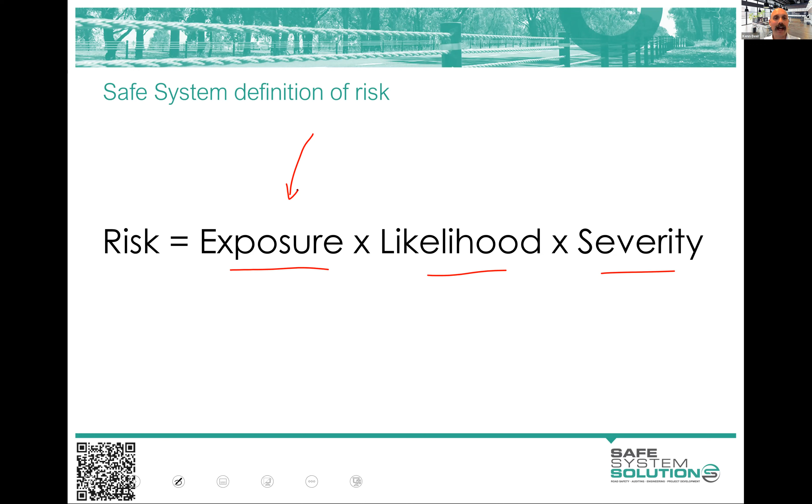I'll remind you what I said in the first session, which was that exposure is really about the number of vehicles, the number of pedestrians, the number of cyclists, the number of motorcyclists.

And you'll see when we get to actually quantifying things in a safe system assessment, it's actually a bit easier to get your head around it because you're looking for numbers. What's the volume? What's the AADT? What's the number of pedestrians or number of cyclists if counts have been done, or you're making an estimate of that?

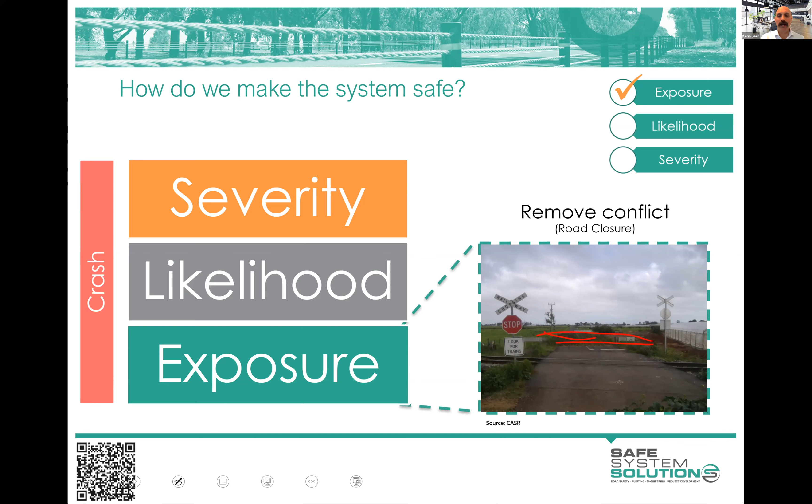And then to influence it, as Mark rightly said, blocking off a leg or blocking off a level crossing in this example removes the exposure because there's no number of vehicles crossing at that point or that separation.

Now, at what point does a separation change exposure to likelihood? So if it was a bike lane, for example, we wouldn't call that a change in exposure because the cyclist is still very exposed to potential crashes.

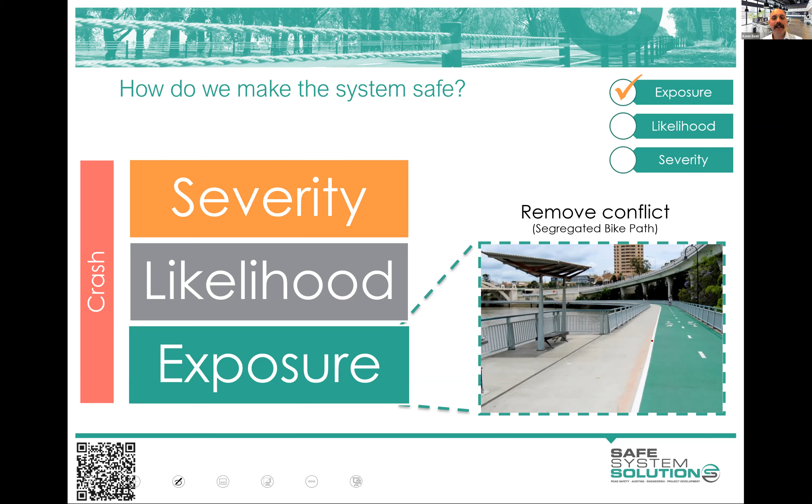If it goes to an off-road shared path facility, like the one in Mark's example, does that mean they're not exposed to crashes, pedestrians and cyclists if it's a shared path? Well, certainly for cyclists, you'd have to account for any that are on the road, still use the road anyway. And then in terms of pedestrians, there is a very slim chance a run-off-road vehicle could get there and strike a pedestrian. But I'll show you, we've got a little fact sheet to help you along this.

Exposure, one of the definitions of exposure in the Australian Safe System Assessment Framework - we haven't got into this yet - but it says AADT, side road traffic volumes, number of motorcyclists, cyclists, and pedestrians crossing or walking along the road. So you can see it just brings us back to numbers.

There's a bit of flexibility in the assignment because it was sort of worded around what's influencing that. So if you had said it's the major highway, or it's the direct pedestrian desire line to the shopping centre or the bus stop or whatever it is, that's okay, because that's going to influence the number of people. But in a safe system assessment, an actual assessment, you're just going to be really reporting on these bits.

When you are scoring things in a safe system assessment, it is important to get some clarity around which category things fit in, just to make sure we don't double count risk. There can be a temptation to double count risk unintentionally, just the way things play out.

We've created the Australian Safe System Assessment Framework document, which you've got a copy of on your memory stick, it's in Moodle, and we'll bring some printouts when we come up. It has some good help for you.

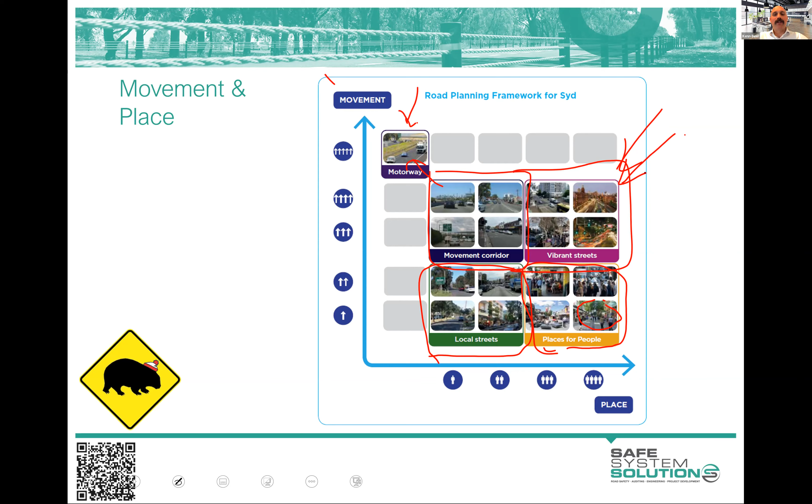So I can get pretty good alignment with safe system principles from a vibrant street by putting up barriers, roadside barriers with maybe pedestrian bits on top of them, so pedestrians really can't get into the street, can't cross the street, and build some big overpasses. By doing that, I'm going to get better alignment with safe system principles. Pedestrians, I probably won't be exposed to crashes there, so the exposure is low, so the risk is going to be very low for pedestrian crashes.

It's going to turn it more into a movement corridor for vehicles then. It's really not going to help the place side at all, because it is going to reduce the place value of the area. It's not going to be a nice place to hang out, to trade, to interact, because it would be very cordoned off. So that's just an example of why you'd be thinking, okay, maybe then if we want to have more place value, we play with the speed and try to do speed calming measures and other bits and pieces. So it's all about the recommendations, really, is why we want to delve into the movement and place. It may help us a little bit with understanding some of the risks that may present, but really it's for good, appropriate recommendations.

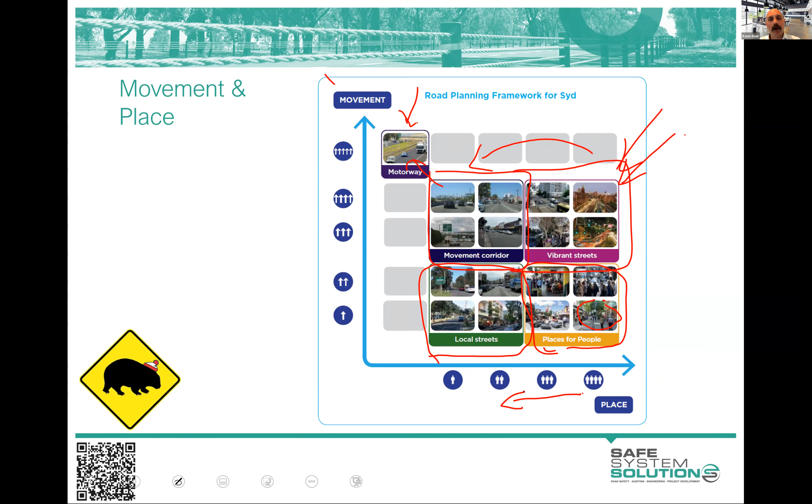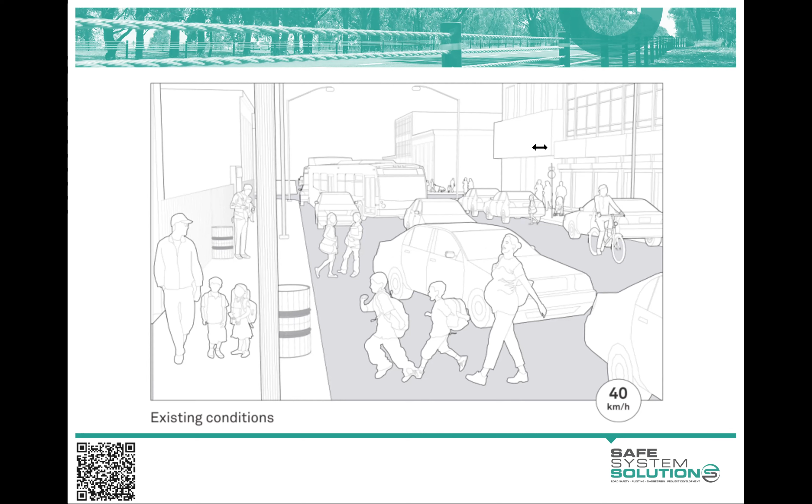Okay, seeing some good ideas coming in. Thank you to people who are putting exposure, likelihood, or severity in there, and you're doing a good job of that. A lot of people are popping in things like... hang on, a few more coming in. This is good.

Okay, so I can see quite a few people talking about things like stopping vehicles getting in there, and I think that is a great place to start. When you have a place for people, it's in that category, or whatever that name is for it these days, the idea of restricting vehicles through an area and changing the exposure to crashes is a great place to start. We've just identified it as not a movement corridor, thus if there are other ways to move through there, that's good.

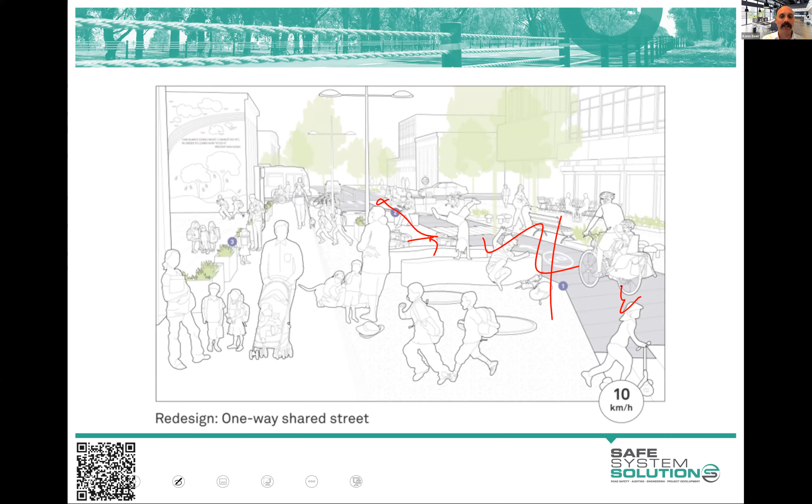As I mentioned, as the movement requirements go up, and some of you already had this in mind, you're creating these dedicated facilities, but still really trying to cater for good areas for playing, socializing, trading, low speed still of any vehicles moving through the area.

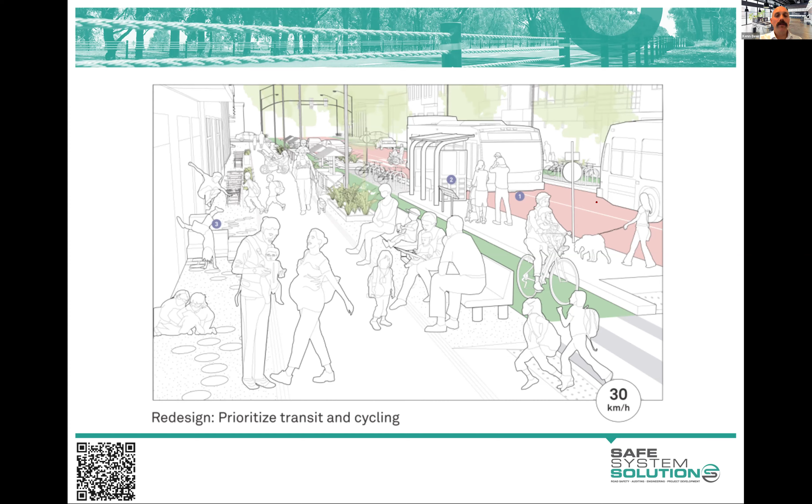We're into those local streets—the local street sort of category, where we're really saying that there's not a major movement required. Of course, there is movement required through there to get people to their houses and for the rubbish truck to get in and those sorts of things. And there's not a huge place value to it. It's not like we're seeing trading cafes, there'll be an occasional cafe or things, but really not this hub of activity like the places for people.

In these scenarios, we're really starting to prioritise the protection of vulnerable road users, because there will be vulnerable road users in the area, in terms of our limiting design factor. And we should be thinking of those speeds of vehicles to keep them within those ranges we want for tolerance to physical force.

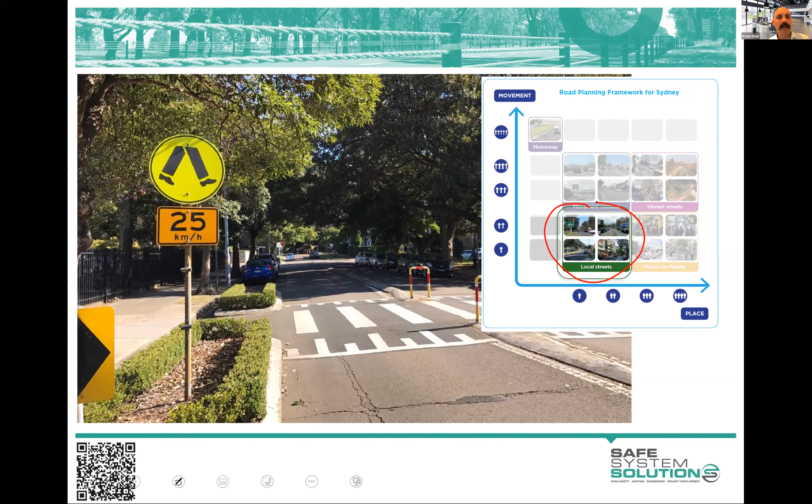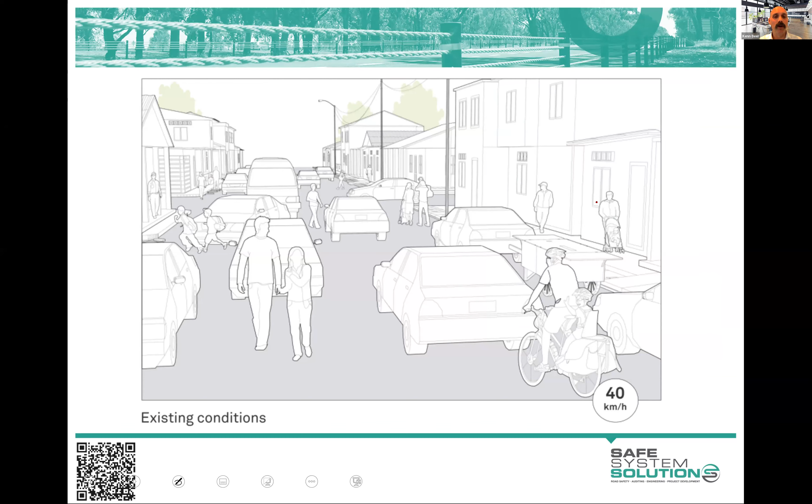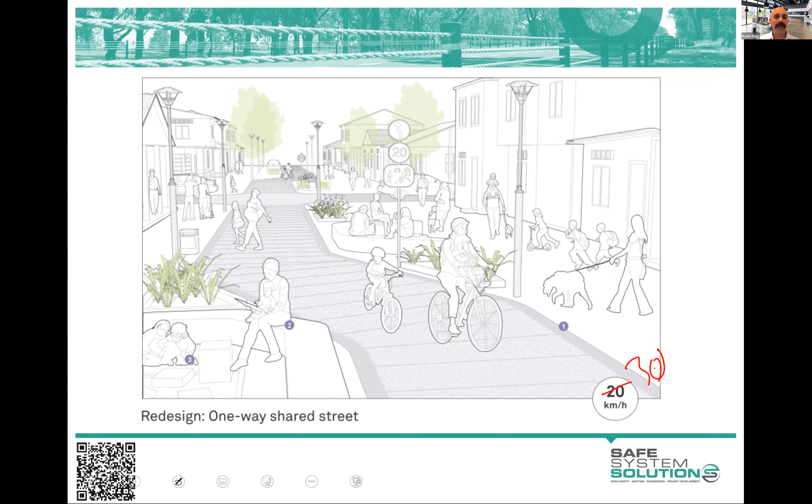So in a scenario like this, which is a fairly dense residential environment—this is an artistic impression—but you'll see it moves to similar sort of stuff, but with a bit more movement facilitated through there. Speed's very, very low still, so 20, maybe 30 through there is very nice. We're not trying to make it so people can run through there or get through there quickly. In fact, we're actively discouraging that because it doesn't have that movement requirement.

But let's talk about vibrant streets. This is a tougher category, really tough in the sense that we want both movement and place. So this is the one I'm going to give you a good 5 minutes on, because I want you to go and have a stretch and fill the water up. So we're seeing here a large sort of arterial road going through an area, and what do we got there? We've got a pedestrian overpass. We've got pedestrians, we've got cyclists, we've got people crossing. There's a bit of pedestrian fencing in a few areas there.

We're going to do the same exercise, but what we're saying is we want to change this, alter this environment, and we want it to have high place value as well as high movement. So we want to sit it really in that vibrant streets category. It's the same thing, just come up with your ideas on alterations here. But remember, when we make these alterations, we want to increase the place value and movement for all road users. So 5 minutes, fill your water up, and we'll get back to you in 5.

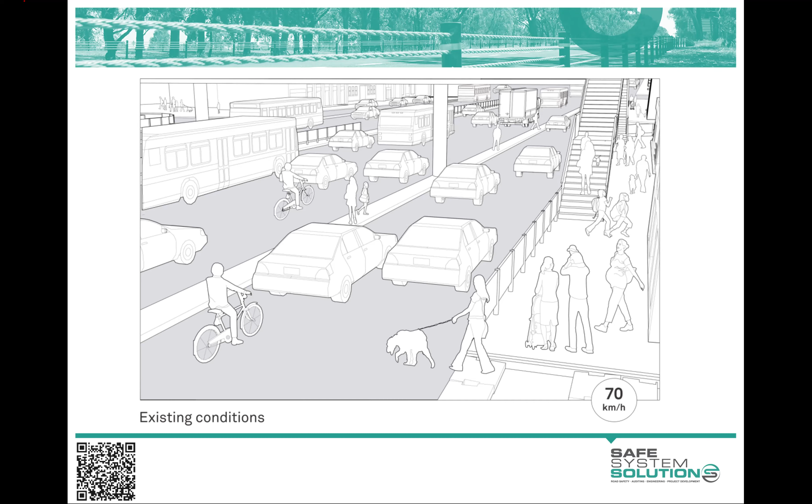Right, another minute to go, and I'll get people to start jotting down a few ideas into the chat again, popping exposure, likelihood, and severity in there.

I'll give it another 30 seconds for people to jot an idea or two down on how we get better alignment with safe system principles out of this area, and we also get it into that high place value, still high movement corridor.

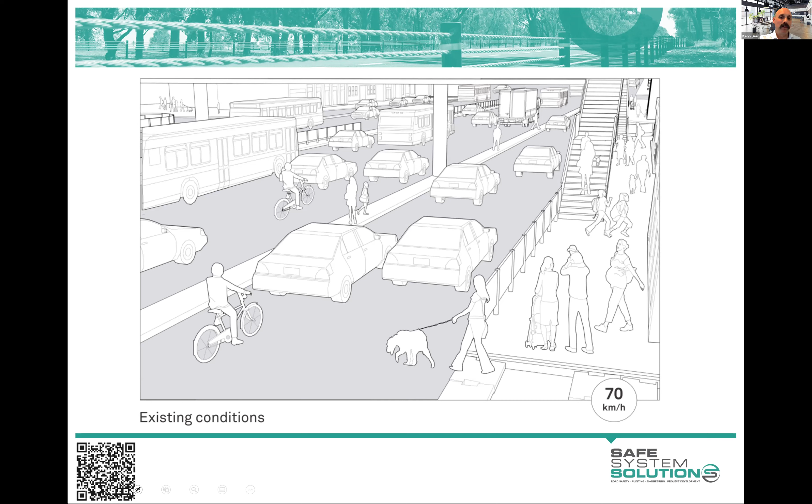Now, in our very traditional sense of movement, if you were thinking of just passenger vehicle speed through there and you did your microsimulation modeling or the like, or you did your SIDRA analysis and things, it probably wouldn't come out as good for the cars. But certainly for other road users traveling through there in public transport, bikes, and the like, plus we get all the place value of it and much better alignment with safe system principles.

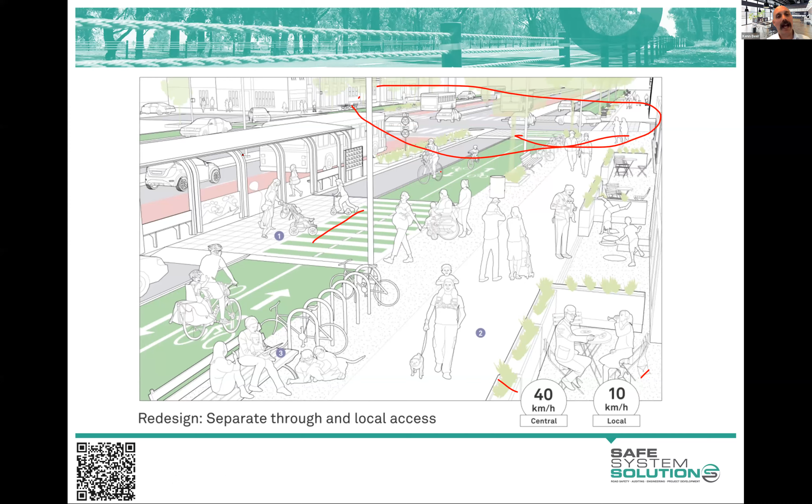And we are seeing some of it, and we're seeing things like protected intersections coming out, so creating those areas for other road users to keep that movement, but also do it in a high safe system alignment. I'll talk about this a little bit more, these sort of protected intersections and those sorts of things later.

But certainly, around New South Wales, we're seeing a lot more of this sort of stuff. And when we do some sort of facility like this for bikes, which is really a pretty good movement corridor for bikes, it has a little bit of place value addition to it.

Are we categorizing that as exposure, likelihood, and severity? I would categorize that as likelihood of crash, reduced by the installation of this for bikes. Vehicles can enter that quite easily if somebody was on their phone or drifted out of their lane. Also, there's the points of turning in and coming out, which provides conflict with passenger vehicles. So it's less likely there's a crash, but there's certainly still the exposure.

When we get into the movement corridors, this is where we can really start to look at things where we don't want to intentionally erode the place value, but there's no need for the requirements to preserve that place value because it's on the way down. So we could do things like fencing through here to stop pedestrians crossing, barriers if we wanted.

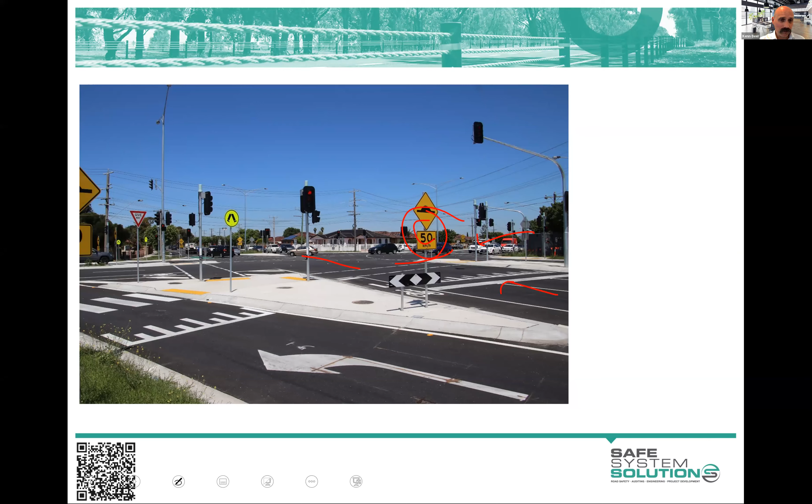Pedestrians and cyclists are obviously our most vulnerable road users. Severe injury risk is around 10% at that 20 to 30 kilometre per hour mark. Death is almost certain for a direct strike of a pedestrian around 50 kilometres per hour. Young and old are even more vulnerable, and you can factor that into your safe system assessment if you have a lot of elderly or young people, factoring that into your severity scoring. We really want to aim to manage speeds to around that 20 km/h mark where pedestrian and cyclist volumes are high, otherwise try to separate. It can be challenging, but the philosophy is there.

But separation is providing us with quite a good opportunity. There's lots of new ways coming out for how it can be done, great guidance documents from New South Wales about providing better bike facilities, separated facilities, Copenhagen style lanes like this, where we push the parking out and bikes can run on the curbside.

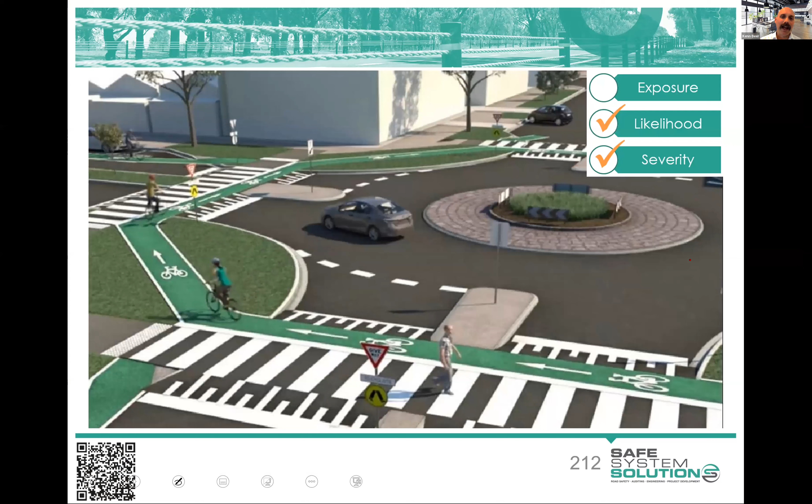And how to treat roundabouts - we know roundabouts are doing a good job reducing the severity of crashes for passenger vehicles. For pedestrians and cyclists, they can be a little more challenging sometimes, and we do know there's a reduction in severity of crashes for pedestrians at least. There's research behind that, but pedestrians really don't like crossing there. It erodes place value for them because it's more challenging to cross.

So things like these protected roundabouts are quite good for reducing the likelihood of crashes for cyclists, vehicles and pedestrians, and the severity of crashes is very low with the slowing of vehicles on approach to the roundabout, and the raised crossing point going around it. This one's the Moray Street one, which has been built. Essentially a cyclist wanting to do a right turn comes around and does that, and off they go - priority for cyclists, priority for pedestrians.

Give way signs essentially make this a road in its own right - the bike facility is a road in its own right. I'm going to try to provide enough storage area for one vehicle to prop there getting out of the roundabout, but a lot of these treatments are installed not necessarily with the bike lane - that's the new bit, but pedestrian crossings around roundabouts are fairly common, lots of those out there. Some people get frustrated by this idea because of the potential for passenger vehicles to come in here and store, clogging up the intersection.

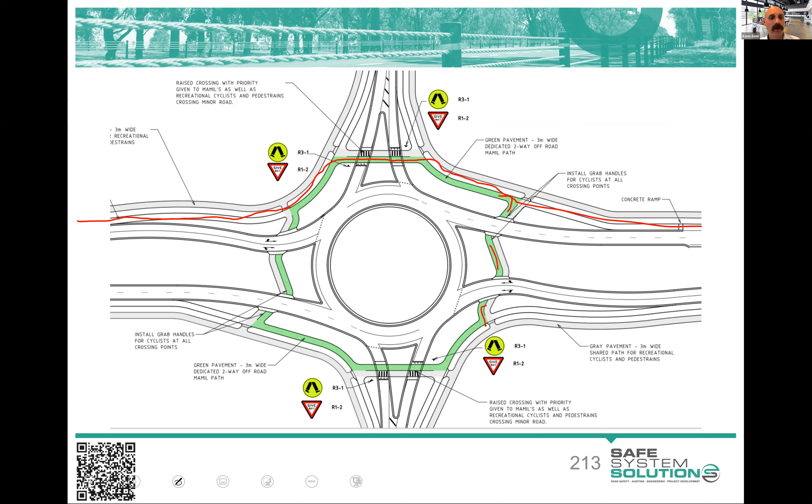In terms of cycling treatments, I like this adaptation of a Dutch diagram, which shows we can get sharing of vehicles and bikes in low speed environments, represented by this symbol.

I'll give a prize, haven't given one out for a bit. What's that symbol called? It's not used a huge amount in New South Wales. It is a Sharrow. Sergeant Cycle, I like it. I might give Billo there a prize just for entertainment.

It's called a Sharrow, stands for shared arrow, and it designates points where cyclists and vehicles share the same road space as a warning to drivers. At low speeds, that's the principle of sharing space, but as soon as you're above around 30km/h, you want some physical separation, possibly using parking as a separator. Above 70km/h, full off-road facilities is what we should be aspiring to. High-level conceptual stuff, but hopefully that sparks some thinking.

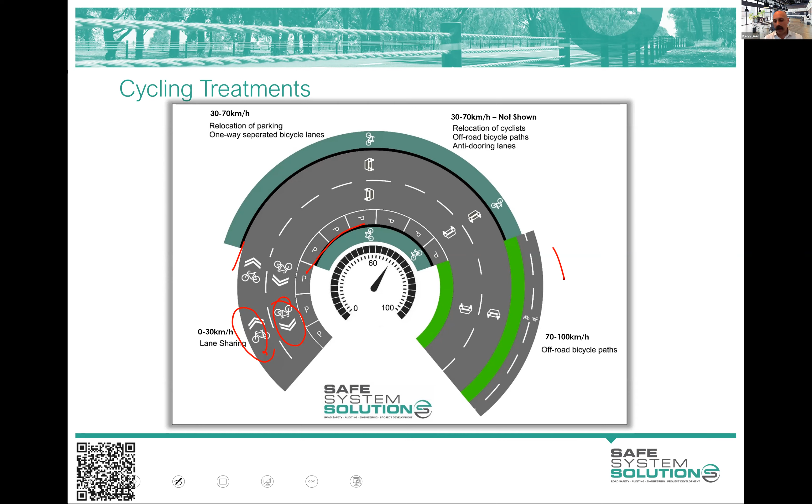Okay, pedestrians. Let's have a brief chat about pedestrians and then motorcyclists, then I'll give you time to do your quiz and finish your assignment for those who haven't. We talked about wombat crossings earlier, a raised pedestrian crossing.

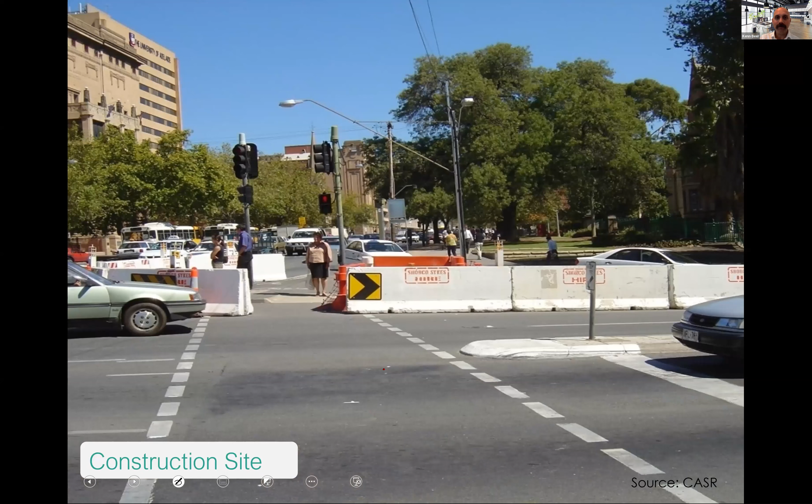Does that count as a wally, as in a wombat? Very good - no, it does not. That was no wally there.

This photo analogy out of Adelaide from a few years back is quite interesting, and it shows that we know what a safe system for a vulnerable road user looks like. But this is a construction site - they're doing electrical works in the conduits and those sorts of things, working away in different areas for a week or so. So in order to keep the workers safe, there was a reduced speed limit. Back in the day it was 60 kilometres per hour through there, but it went down to 25 kilometres per hour, because that's the South Australian speed limit for work zones.

25 kilometres per hour, barriers are up. The workers go about their business, working away. They finish everything they need, then the speed limit goes back up to 60.

Barriers are all removed, and about 3,000 pedestrians a day stand pretty much where the workers were and cross the road.

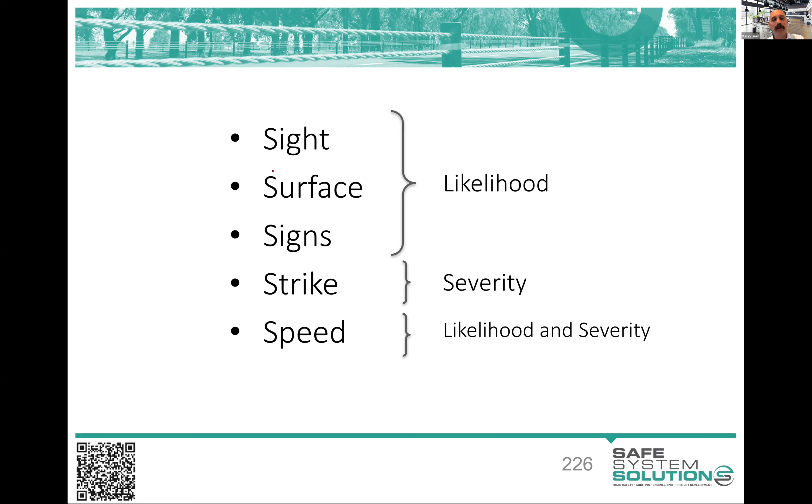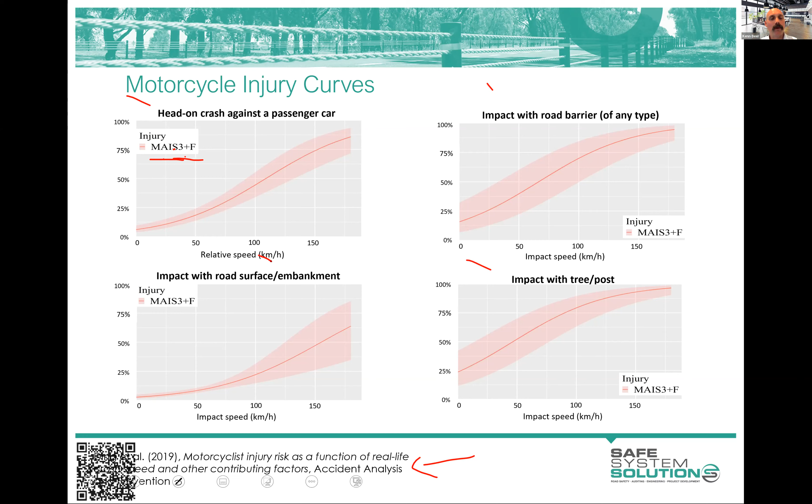There's been some recent research released on the motorcycle injury curves from 2019 research, which slightly alters the way we look at them. I've popped those into your memory stick, and I'll put the reference down here if you want to look at the full research report. It's quite interesting stuff, looking at MAIS 3, which is high-level serious injury and fatality, for four different crash types: impacts with barriers, trees and posts, embankments. I'll talk a little bit about barriers shortly with motorcyclists, because it's often an area of interest.

So let me just go through these 5 S's very briefly. We'll just touch on them, so you've got a few ideas in your mind when we get into doing safe system assessments and you're asked to specifically think about motorcyclists. So...

I've spent a lot of time talking to motorcycle groups about this topic and finding appropriate solutions. Speed really matters for motorcyclists. Speed limit reductions work, and advisory speeds work well, as long as we're consistent with our advisory speeds for the route. So make sure you've done your survey track and got everything right from that perspective. This reduces the likelihood and sometimes severity of crashes.

The reason I say sometimes severity: it will reduce the severity of crashes, but if we're able to reduce motorcycle speeds from 110 to 100, we're still in the area of maximum severity for motorcyclists in terms of crashes. So when you do a safe system assessment, you find that in the 90s and even 80s, it's all the maximum score for severity for motorcyclists - that's a 4 when we do the scoring. So we have limitations in managing that severity, and that's why it's going to be very hard for us to plot a vision zero with motorcyclists the way we currently operate.

So we've covered a nice base of content there around the safe system philosophy, exposure, likelihood, severity. We've talked through different road users, done some energy intersection analysis, talked about movement and place, and talked about pedestrians, cyclists and motorcyclists. Now we're at a nice point where we can dive into how we actually put scores to these risks we've been talking about and how we categorize treatments.